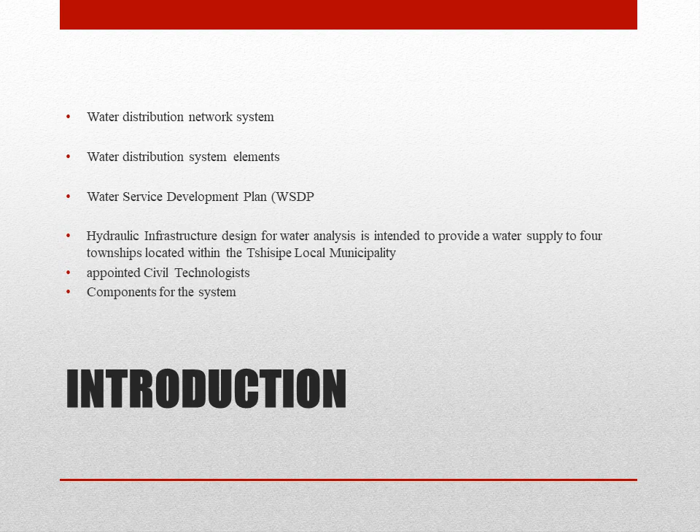So moving on to the literature review. So water is the source of life, of course. People depend on it for drinking, producing food, and maintaining basic standards of hygiene. So the Constitution of South Africa Act 108 of 1996, and specifically its Bill of Rights, sets out the basic right of access to sufficient water as well as a safe and healthy environment. Furthermore, the Constitution obliges water service providers to meet their constitutional responsibility of providing sufficient water services to the community.

So the focus area. The Tshisipe local municipality is a small town in Vhembe district municipality in the Limpopo province of South Africa, 39 kilometers southeast of Messina and 86 kilometers northeast of Louis Trichardt. The data compiled by Statistics South Africa in 2011 suggests that the local population stood at 1052 people according to census, with water inside dwelling at 8.2%, and the rest of the local municipality water supply relies on rivers and dams.

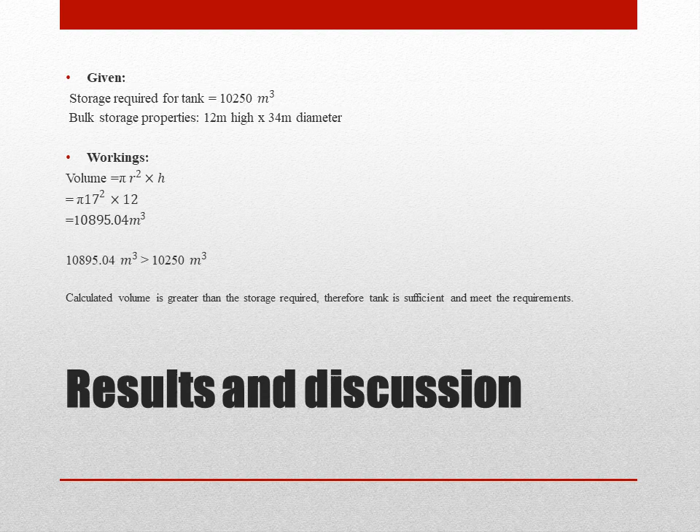So the results and discussion. I was given the storage required for a tank, which was 10,250 cubes. The storage property is 12 meters high times the 34-meter diameter. So as you can see, the volume that the storage tank can hold is 10,895.04 cubes, which is greater than the storage required. Therefore the tank is sufficient and meets requirements.

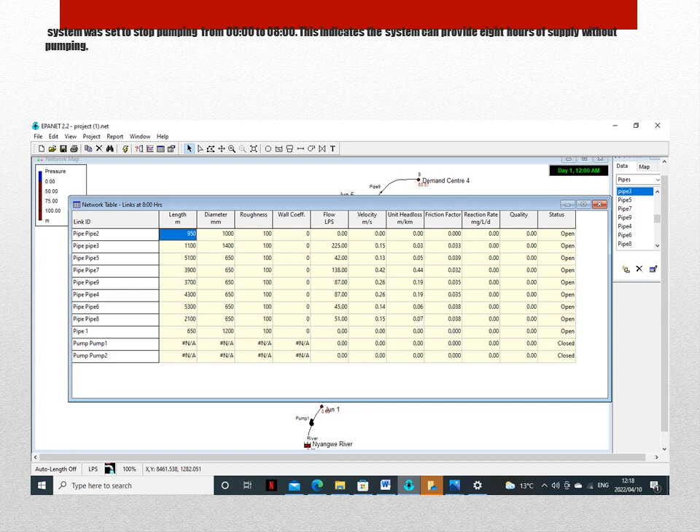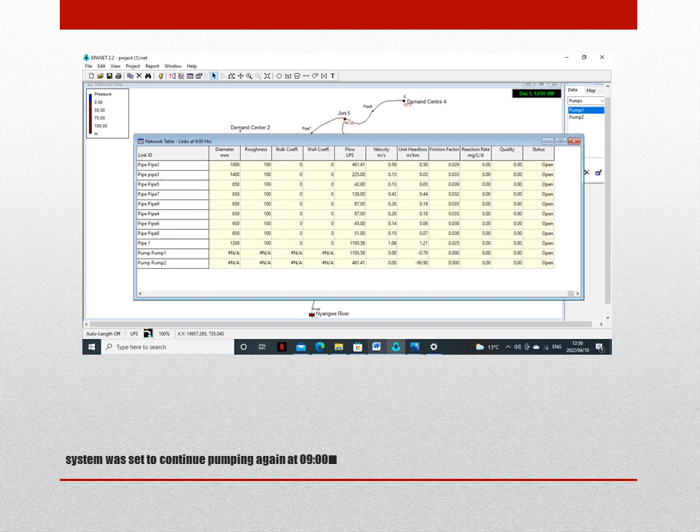So the table in front of you, since I think I forgot to mention that the task given to us clearly describes that the system must work 8 hours a day without pumping. This shows you that the two pumps are closed from 12 o'clock to 8 o'clock, and the system is still running. And in the second one, the system was set to continue pumping again at 9 o'clock, and I've opened my pumps.

Moving on. In front of you now is the profile head for all components from 12 o'clock to 8 o'clock when the pumps were closed, which still shows you that there is movement of water from the storage to demand center 4.

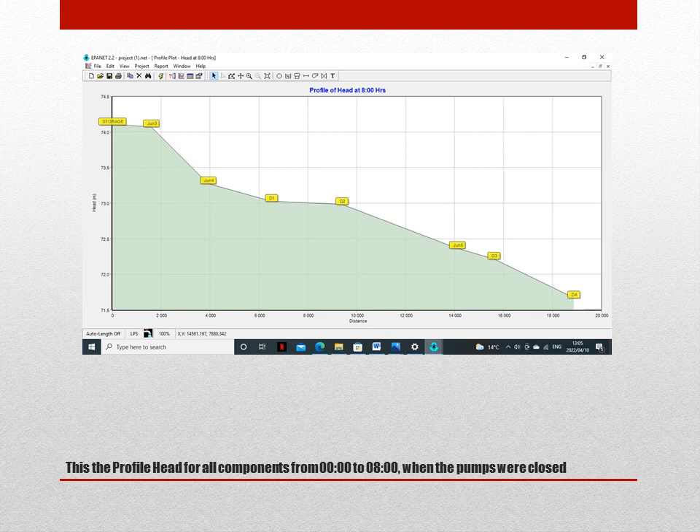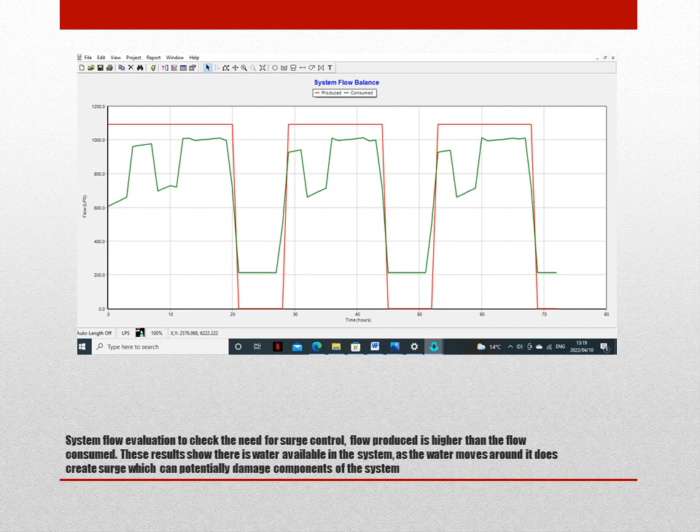Now, in front of you is the system flow balance, a system flow evaluation to check the need for surge control. Flow produced is higher than the flow consumed. This shows that there is water available in the system, and the water moves around and creates surge, which can potentially damage components of the system. And this is the hydraulic gradient for all components, which shows you how the pressure is moving within our components.

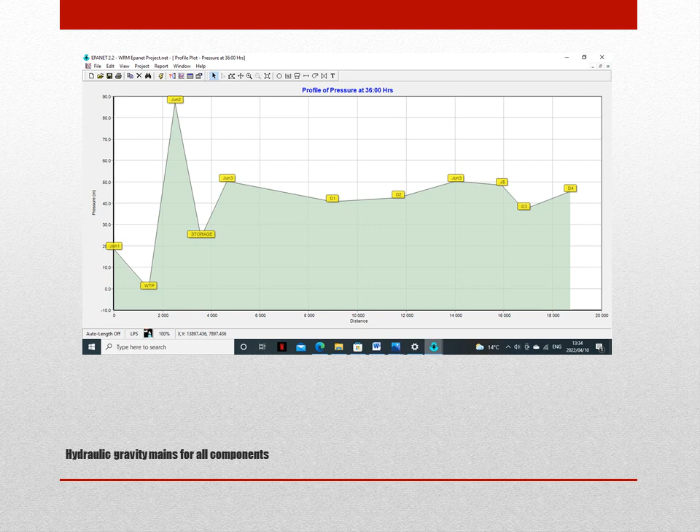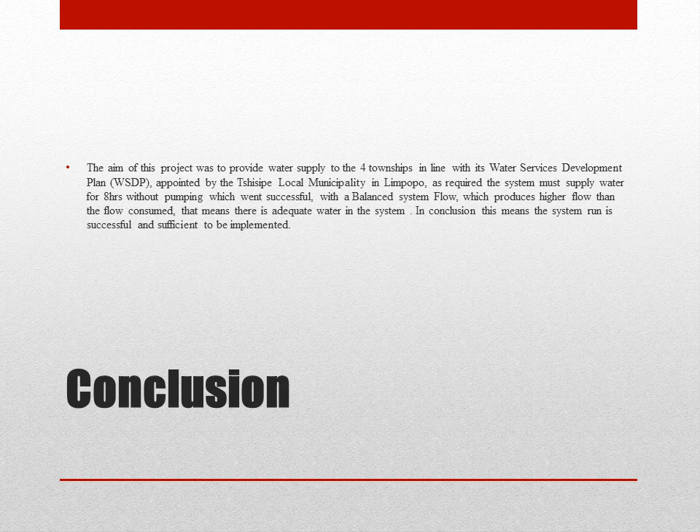So in conclusion, the aim of this project was to provide water supply to the 4 townships in line with the water service development plan, appointed by the Tshisipe local municipality in Limpopo. As required, the system must supply water for 8 hours without pumping, which was successful. With a balanced system flow, which produces higher flow than the flow consumed, there is adequate water in the system. This means that the system run is successful and sufficient to be implemented.